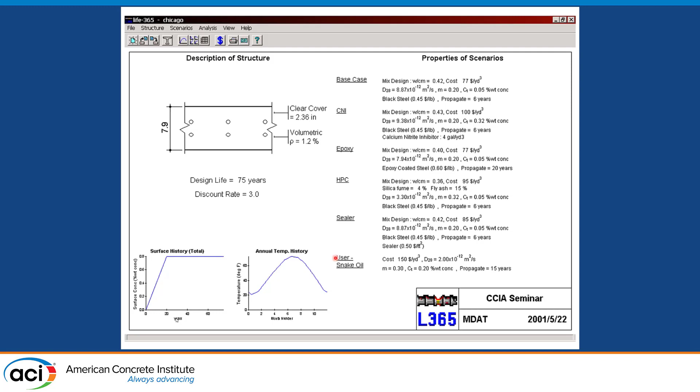And the idea was that you could compare these different options. At time 0, the cheapest option in this example was the base case, just regular concrete. The most expensive option was actually the snake oil. The other ones were in between. But the base case also required a repair early on, which then had a present value cost of that repair that would increase the value.

And then the cost would go up higher and higher as time went by, such that by the time we got to 75 years, in present value terms, the base case concrete was the second most expensive. The sealer was actually more expensive. The epoxy made more sense in this example. The calcium nitrite corrosion inhibitor also made sense.

High performance concrete made the most sense, although the product that was the user design product called the snake oil ended up being the best in the very long term, but it also assumed there'd never be a repair, which may or may not be credible from the perspective of understanding things.

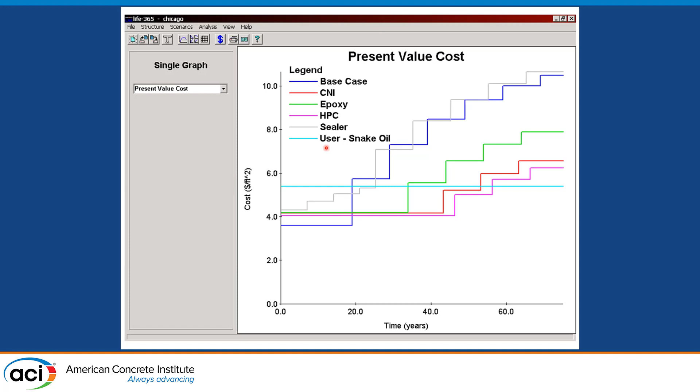Another thing you can see from these comparisons, though, this particular example was actually made by Mike. You can see his initials right there for a Concrete Corrosion Inhibitors Association seminar. And you can see the file was made on the 28th of May, 2001, a little bit early in the morning, suggesting that Mike's clock wasn't right on his computer at the time that he made that file.

And so where did that program come from? Some of you have used that program either on the web version or indeed that original version itself. And I want to tell you the story about how it came about, because I think it might be of interest. It started here in 1995 when Mike was teaching his first course. He taught me a first course, actually, the first lecture on October the 6th of 1994 in Doug Hooton's course of concrete construction, where he talked about alkali aggregate reaction. He did a good job.

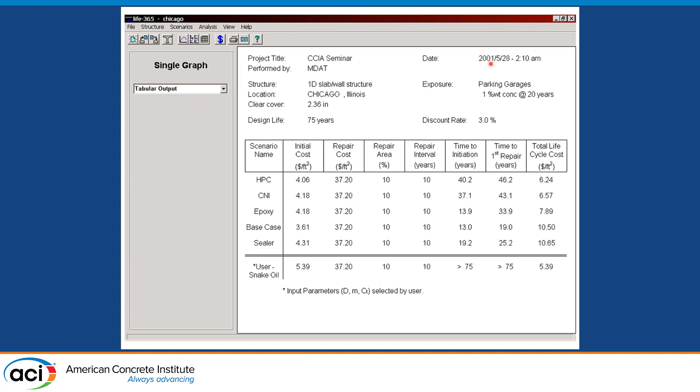And the first course that I took with him was, I think the first time he taught it was the repair and maintenance course in January of 95. And it actually led to the development of Life-365 itself. This right here from February 95 is the proposal for the project in that course that ultimately turned into program Life-365, basically. And I was a graduate student at the time. I was suggesting that it be a group effort between me and my friend Chris and my friend Savio. In the end, it was just me and Chris that worked on it together.

And you can read all that, but the key thing to note is that the proposal was to develop a computerized finite difference model of concrete in 2 dimensions, blah, blah, blah. You can see more discussion. And we said, using these overly complex methods, that was a joke, that involve substantial nonlinear synergistic effects, that was Mike's favorite word at the time, that we can get a good mark and a plethora of pints. That's what the goal was at the time as a graduate student, but I didn't realize that 25 plus years later, I'd still be talking about it. Indeed, some of you might regret that that's the case, but here we are. The redacted section was private information that we can't release for privacy issues, which is quirky, but there we go. That's February 95.

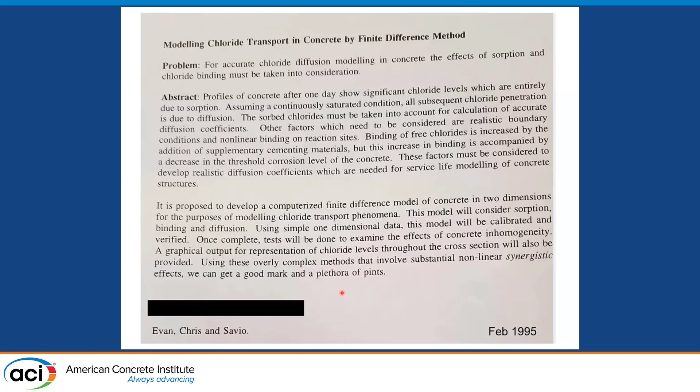But I think it was Mike that made the joke rather than us. He renamed the title of our presentation, Possible Applications for Tetris and Concrete Repair. We got the last laugh, though, because this was done in the large lecture hall here at the university. And it had, in 95, which was very unusual, a large display screen at the front of the class. And at the end of the class, we actually played Tetris on the big screen, which made him laugh.

But then we also showed a game called Descent, which was a 3-dimensional flying shoot-'em-up game, which we told him was representative of the internal pore structure of concrete. And we speculated at the time about whether someday we would actually have virtual reality flying through concrete pore structure. It hasn't happened yet, but maybe it has.

I just don't know about it. But it was quirky. But as usual, the take-home lesson from this is Mike has a good sense of humor, and that's a great thing to have as a professor.

And one of the things he was worried about at the time was A, how do you deal with the background levels? And B, do we have to worry about this being a 2-dimensional shape rather than a 1-dimensional shape? And it turned out that I had done work previously in my undergraduate degree on how to do finite difference, which is what the project ended up being. And as a result, we were able to make good progress in both of those questions. Dealing with the background was easy. You just start with an initial profile and propagate through.

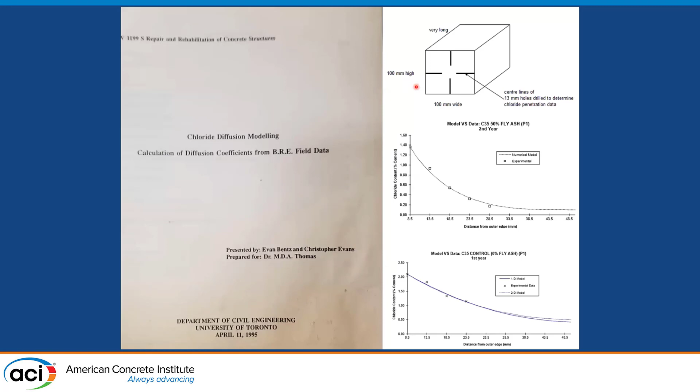But Mike is no fool. He then proceeded to get another student the following year to check the results, because it's totally possible that what we said was not true. So Pierre Pung did work on that to find out whether the results were good. And they turned out well. And so we kept on working on it, which was good.

He then wrote a paper in Dundee from 1996, actually with me as an author on it, which made me as a master's student feel very special. There was an ACI paper in 1998 on the model with me as an author, and a 1999 paper that's primarily about the data, so I wasn't an author on that one, but there were over 1,000 citations between these different papers, indicating that Mike is generous with his ideas. He doesn't want to take all the credit for himself. He wants to share it, which again is a sign of a good engineer and a good professor.

Later, there was a version that had an interface in it in 1996, and indeed a version with wicking, capillary suction, in it in 1997, which indicated that we kept on working on the program together as I worked on my PhD, and he continued as a professor.

The big change happened in 1998 when there was a session set up at NIST, the National Institute of Standards and Technology, to try and answer the question, what should we do about modeling of service life? So this is the official report that came out of it in the end. And in that session, there were people, we call them now stakeholders, from all across the industry, asking the question, what should we do?

And there were already computer programs that some of the concrete suppliers and construction material suppliers had that were being used basically to advertise products. And so there was discussion, should we just use one of those, or should we use something different? And Mike made a strong argument at that session that we should have something that's independent of any of the suppliers, because if it comes from the suppliers, it might accidentally, or indeed maybe intentionally, be biased in a certain direction. So in the end, this is the summary of the recommendations from that grouping. And briefly, number one said we should have something associated with Committee 365.

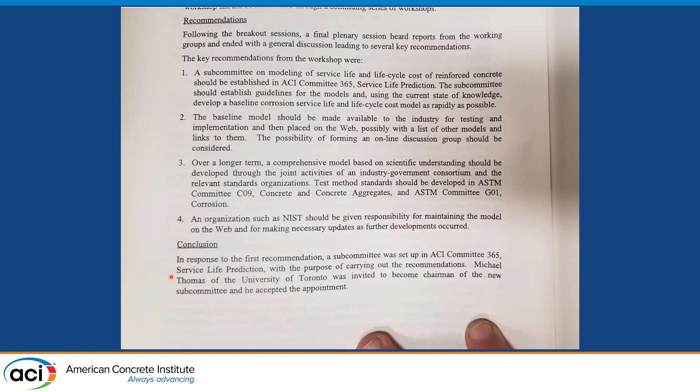So what are some of the lessons that I learned from the development of Life-365? The first one was that key point about having an industry independent program. As I was coding the program, I intentionally didn't look at all the people who had existing code sent to me saying, hey, have a look at this, see if it'll help you. I wanted to make sure that it was a clean room development, as it's called, completely independent of any previous work. And then I checked at the end for comparisons.

One of the things I found was that one of the tools that the industry had been using suggested that bridge decks would have 4.8% of reinforcement in them. Now in Ontario, they have 1.2% reinforcement in them. And 4.8% is a representative value for a heavily loaded column, for example, and you could use the program on a column, but it was being represented as a slab.

Of course, what this meant was if you had anything that changed the cost of your reinforcement, stainless, galvanized, epoxy coated, all those would look extremely expensive compared to the products that that company sold. And it turns out the users of the program weren't even aware that the program had made that strange assumption hiding inside it. So having something that's independent of industry to allow you to compare different options is clearly a good idea, and that was Mike's idea.

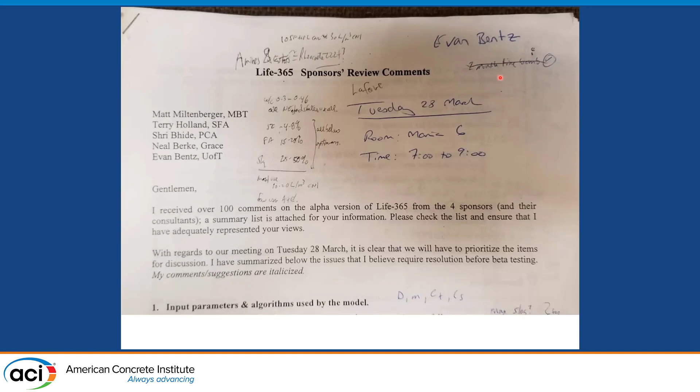At this stage I had just started being a professor, and it was March 28th, the first time I was teaching a course, since I started in January 2000. Things were busy, and I didn't imagine that 2 months later, when this was due, I could get it done. You can see the check mark saying yes, it's a time bomb, but crossed out meaning no, it didn't blow up. It was a dud. We were able to respond to all the comments appropriately and get the job done.

Things kept going from there. The next thing that happened was the fall 2001 conference in Dallas, where Committee 365, which Mike was now chair of, had a session talking about designing for 100-year service life. You can see I underlined my title at the bottom to make sure I didn't forget which one was me.

By this stage we were talking about probabilistic modeling, going beyond what Life-365 does and trying to account for some of the variability. That modeling allowed us to use a Monte Carlo method, a simplification that came from Kyle Stanish, who is now chair of ACI 365 — and indeed I think Committee 365 is meeting right now. With that, and with some assumptions on the variability of the input properties to the program, we were able to come up with a histogram of the expected lifespan of a particular structure until initiation.

This was the key thing here. In this example, I think 6.4 years was the deterministic time to initiation, and the distribution ended up being log normal in effect, with 32,000 individual calculations for the Monte Carlo — spelled wrong, sorry, that says Monte Carlo. This was very worthwhile, and it also led to a paper that showed how we could do those calculations efficiently.

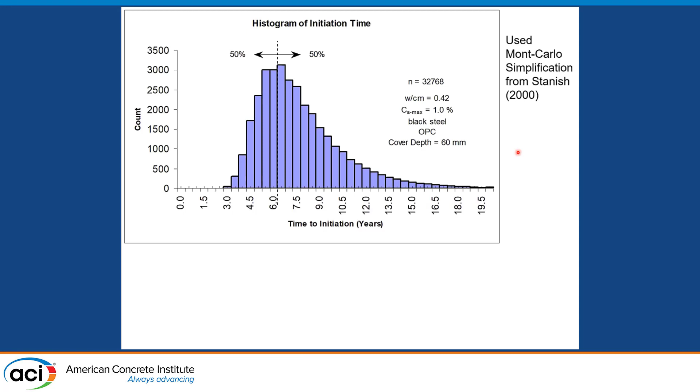But the big thing I learned from that one was that probabilistic modeling can be dangerous, in my opinion. The distribution on the graph before, the histogram, can actually be modeled just with simpler parameters, and that's what the paper talks about, to give that dashed line — a very grotty dashed line there that came from Excel many years ago.

You can see the 50th percentile time to first initiation was here. But because we didn't know, and I think we still don't know, the kinetics or operations of how propagation works, we simply added 6 years. So what it meant was there's a totally deterministic estimate of the propagation time as just a constant — you take the distribution from your fancy model and just offset it by 6 years. This was the potential danger with it.

When the result came in before saying the expected time of first repair would be 13 years, 12.9 years, you'd say okay, plus or minus, yeah. But when you have probabilistic modeling for part of your analysis but not the rest, now you'd say the probabilistic results range from 9 years out to 20 years. That's very practical, very worthwhile, but it didn't include any variation associated with the initiation time.

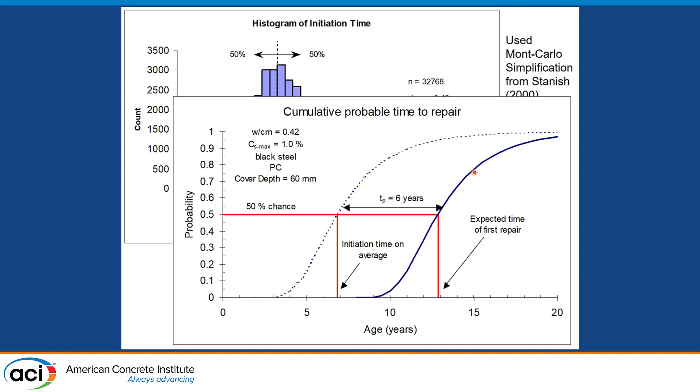Having a single deterministic number that you know in your head isn't the whole story is one thing. Having a range that's not the whole story, I discovered, is much harder to grok, much harder to understand — saying there's a range of numbers, but that range isn't the whole range, is confusing. So I learned to be very careful when using probabilistic modeling, because it can lead one astray very easily, and that can be problematic.

As things continued on with Life-365 and versions like it, Mike moved on to the University of New Brunswick in 2002, but we continued working on some things. One of the things we spent a little bit of time on, but not much, was comparing Life-365 basically to a spreadsheet.

Because it became clear to me after I started teaching finite element analysis here, and doing more work with finite difference, that in fact we could do it all with a spreadsheet by itself. I was going to write a paper about that, but decided not to because it turned out to be too complex, and having it that complex didn't actually help. So Life-365 continues to be a computer program you can use online from the web, and it works quite well.

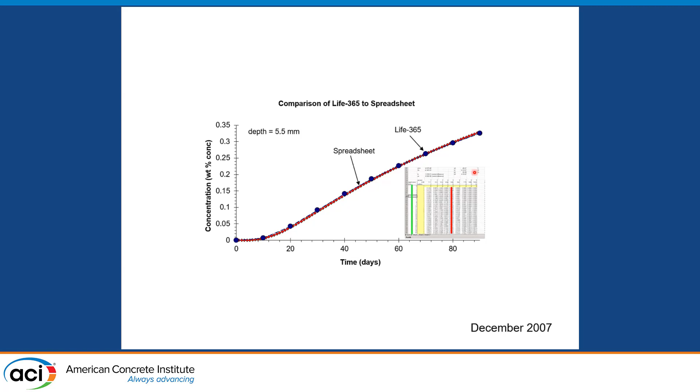What's happened since then? Well, since then, as I've been teaching the finite element course, I decided to make the writing of Life-365 into an assignment in my finite element class. This is due February 5th, 2021. And I teach the students how to do this, basically.

So while 25 years ago I wrote Life-365 as a project and then as a computer program, now every student who takes my finite element course has to write their own version of the program, in effect, but with no interface. Using MATLAB it's usually pretty easy to do. So 250 people have now written their own version of Life-365 since that time. And I asked them, of course, to compare to the theoretical solution of the error function for the simple case they look at, and that does the job quite well.

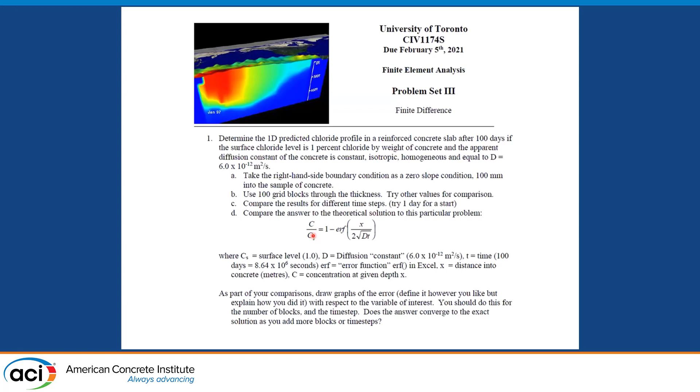I read an introduction to a paper written by Richard Dawkins one time, and he said there was a person he knew who you had to have at conferences. If you wanted to find him, he'd be in the bar at the conference, and you should go talk to him because the person was always worth talking to. And in fact, if you're scheduling a conference and that person can't be there, you reschedule the conference to make sure they can. I think he was talking about Mike Thomas. And so was I. Thank you very much.

I wish there was a way to hear people so I could know whether anyone was even smiling during that, but I couldn't tell.

Oh, I think there was a few smiles in there. That's good. Okay, thank you, Evan. It was a very interesting talk, and it was actually very informative for me. I never really knew the history of 365.

So we do have a couple of questions, and I think we have time for that. So the first one was regarding organic corrosion inhibitors. Wasn't that part of the study originally? And if it was, what is the effect on the life specified in the 365 service life model?